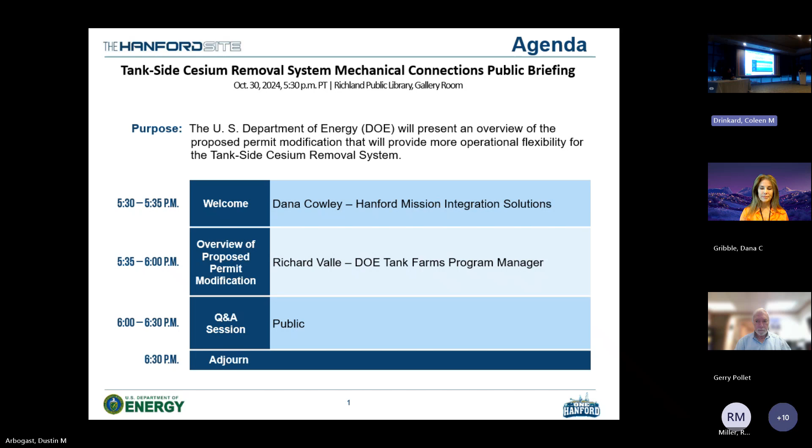Okay, thanks, Dana. Coming through okay? Yes. All right, well, I see we have the slide deck up, so just again, want to give an intro.

As Dana mentioned, we're here to discuss a proposed permit modification. It's under a particular section of the permit, the low activity waste pretreatment section, and we're going to be talking about a particular unit, the tank side cesium removal system, or TSCR system, as you might hear. I'm Richard Valle, a program manager in the Hanford field office in the tank waste operations division.

If you've joined us on a few of these before, we always like to take the opportunity to discuss a very important process occurring on the Hanford site that will continue. So the direct feed low activity waste, or DFLAW configuration, is something we're gearing up towards and will ultimately lead towards the treatment of tank waste at the Hanford site.

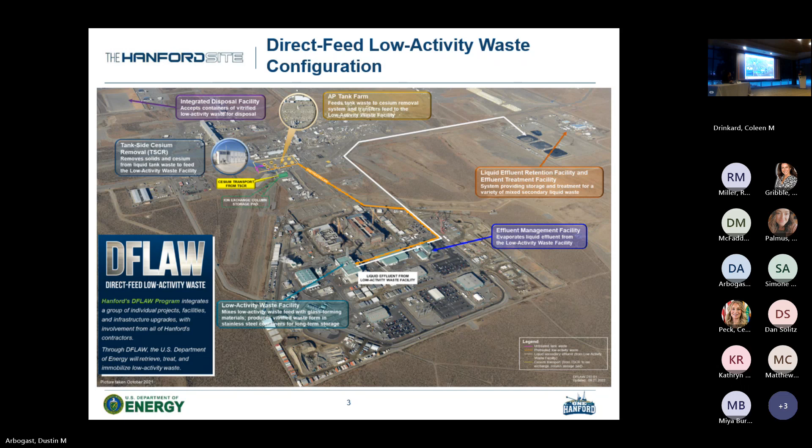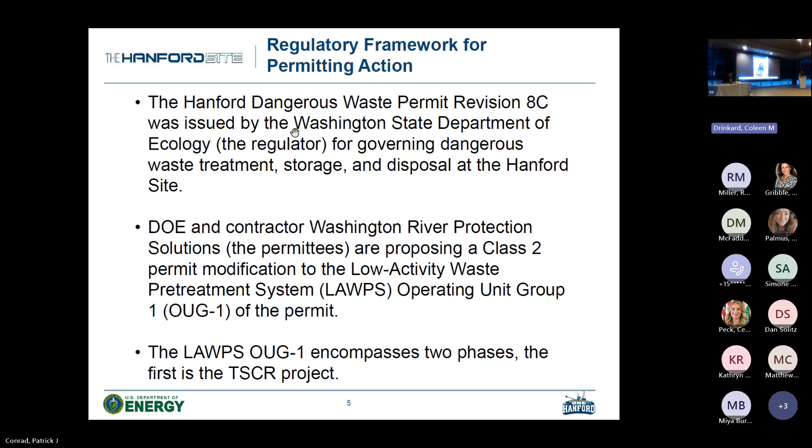And reject streams that are generated during the pre-treatment process are routed to AP 108. As part of that pre-treatment process, to remove the cesium, it uses ion exchange columns, or ion exchange technology. Really, that's a resin material that has an affinity for cesium. The cesium gets loaded onto these columns, and then they become loaded with cesium. They are then swapped out and replaced with fresh columns as needed.

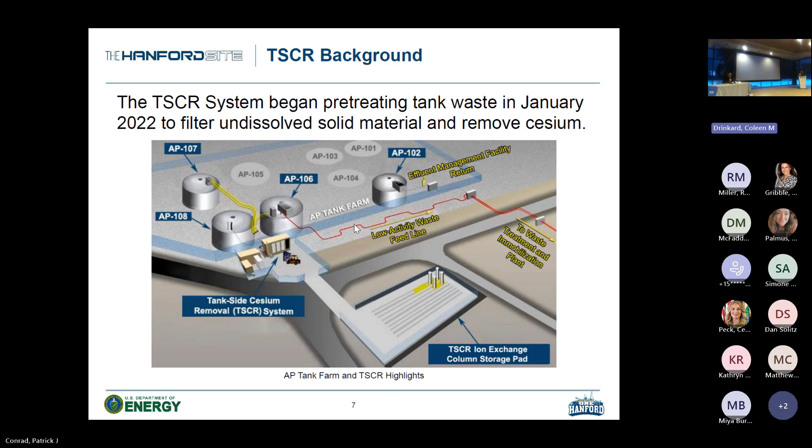You can see the TSCR ion exchange column storage pad at the bottom to describe what we're talking about. So as we load up those ion exchange columns, we'll place them on the TSCR storage pad and continue the pre-treatment process with fresh ones. And then, as we mentioned, in the grand scheme of the DFLAW program, that pre-treated waste then makes its way to the waste treatment and immobilization plant for vitrification, which has not occurred yet, but we have been operating the TSCR to generate that pre-treated material when it is up and operating here shortly.

Okay, over on slide 8 now, the TSCR system. This is probably, again, just putting what we talked about in words on the prior slide. So the tank waste is transferred from AP 107. It makes its way to the TSCR process enclosure via hose-in-hose transfer lines. Those were those yellow lines that we called out in the prior slide.

And then a very important point of emphasis for tonight's discussion: for worker safety, there's really no manned entry into the TSCR process enclosure permitted during waste processing operations. So that's important, and we'll call back on that in subsequent slides here.

But the general arrangement here for TSCR is then shown, still on page 8. There's different enclosures that make up TSCR, the process enclosures we've been talking to, but then there's also an ancillary enclosure and a control enclosure. We'll focus tonight's discussion on that process enclosure.

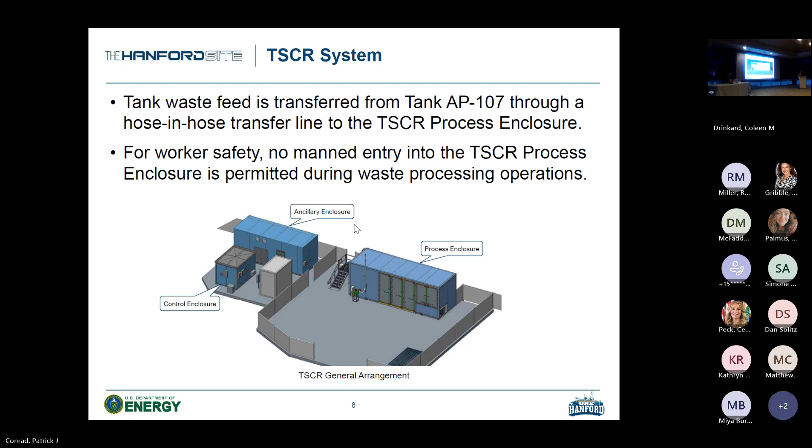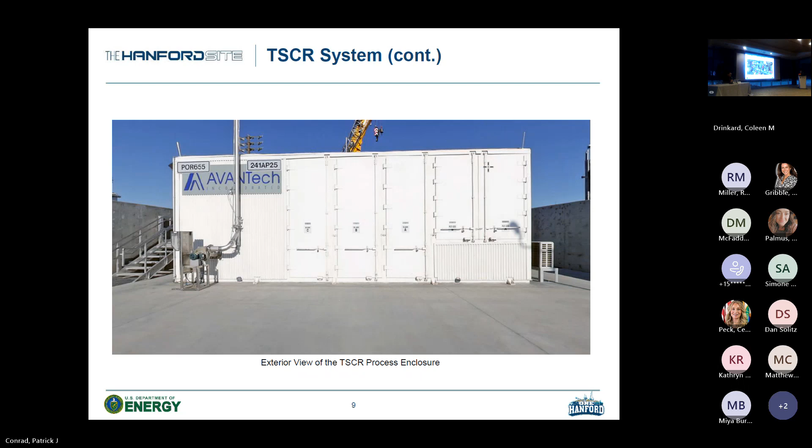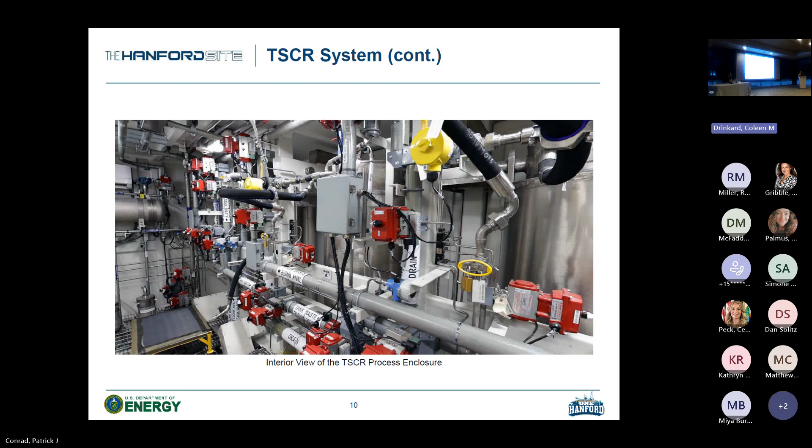Okay, so really the purpose of tonight's discussion is to focus on slide 12. The TSCR is a demonstration project that is currently operating, and we've learned a lot from implementing the system.

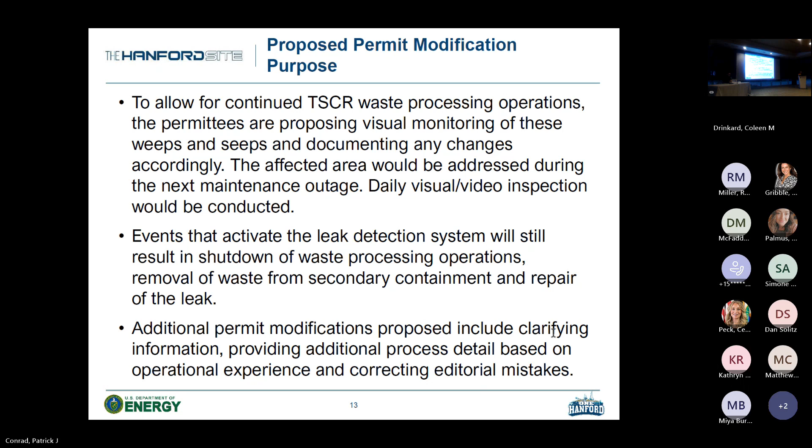Okay, I'm on slide 14. Actually, it's working. So, but still, I'm on slide 14.

So again, to kind of wrap it all up and reiterate some important points, this is a Class 2 permit modification that's being proposed for the low activity waste pretreatment system section, that operating group of the permit.

There are 3 particular sections or subsections within that part of the permit that have been modified as a result of today's proposed modification. That includes the unit-specific permit conditions, Addendum C, which describes process information, and Addendum F, which describes preparedness and prevention. The full proposed permit modification and all the language is available to you on the Hanford Dangerous Waste permit change notice that's available attached to this meeting invite on Ecology's webpage.

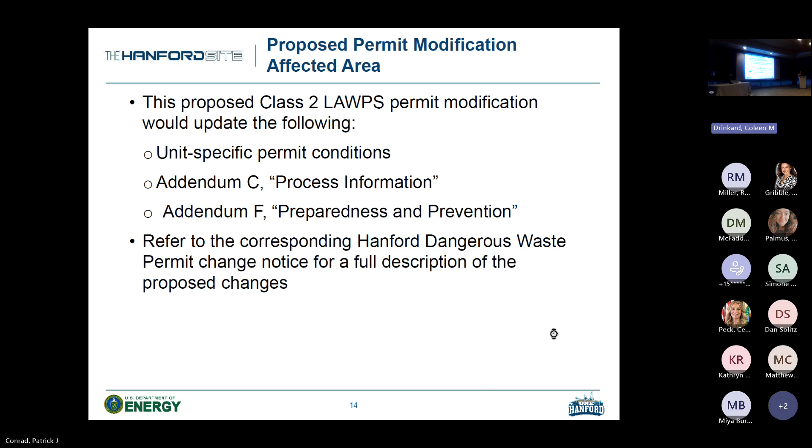On slide 15, the proposed Class 2 permit mod has a 60-day public comment period. As was mentioned earlier, it's open through December 12th. It's open currently, and it'll run through December 12th. We encourage you to submit comments electronically as preferred via the hyperlink noted there, but snail mail is fine too, and that can be sent to the address listed below.

I think that opens it up for the last slide, which was for any potential questions.

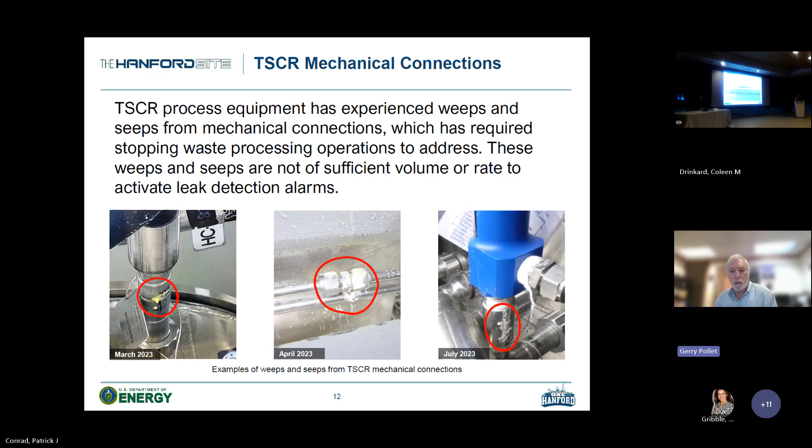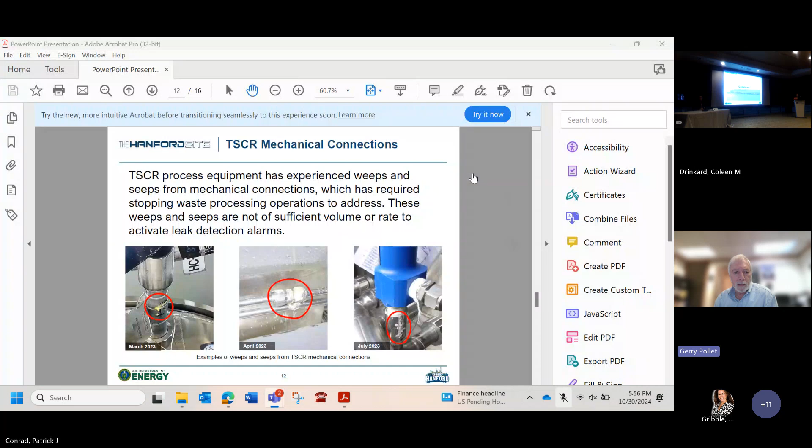I have a couple of questions, and one is a follow-up to me. The link from the notice document has the transmission of the permit proposed modification. There is no RCRA permit fact sheet, which usually accompanies a modification, as part of that. Is this a brand new write-up for this section of the permit, or is it indeed a modification?

It is a modification, so the current section exists, it's been modified. There are red lines, if they're not posted online we'll have to check into that, but it is a modification, a red line update to the existing permit section to account for this proposed changes.

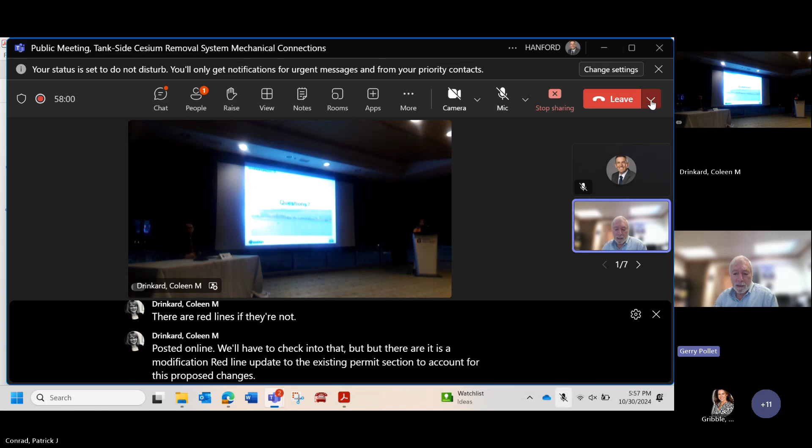They may be redlined. The difficulty is that if you look at the contents, it doesn't show you where to go look for anything that is redlined, and the scan through didn't. My interest, on the substance side, is what is the leak detection minimum alarm requirement currently, and how does it relate to what has been weeping, seeping, and accumulating? And secondly, how are the requirements handled for visual leak detection inspection addressed when there is no permissible entry?

Okay, so the weeps and seeps, there has not been an instance where it's actively leaked to activate the leak detection alarm. So these, like is shown on the photo, they are weeps and seeps outside of where it should be, out of the piping material, but they solidify as was noted and shown, and have not activated the alarm. So in terms of quantification, that's the quantification there.

And then the third, or your, well I guess, question. The first part of the question is what would trigger the alarm? What is the minimum leak detection specification in the permit for triggering an alarm, and what kind of backup is there if there is no visual? Sometimes there are pits, etc., that have a visual inspection, remote visual opportunity for ensuring that there's no leakage from a hazardous waste treatment tank or piping, in order to back up a single leak detection alarm capability.

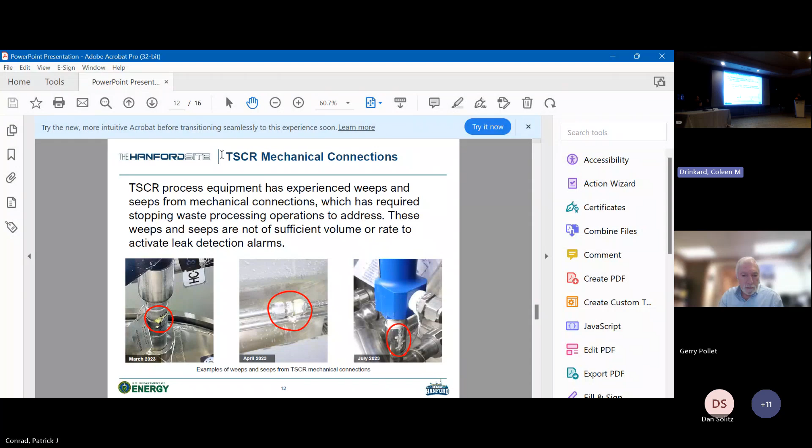Right, I'm correct. I would jump to slide 11 there. And if we could do the same, that'll show a schematic of that. So this is the TSCR process enclosure cutaway that shows the sloped flooring, and it slopes towards the low point. And this is that leak detector and pump. An active leak would make its way, slope to the leak detector alarm, shut down operations, and then allow for the corrective actions to address the leak.

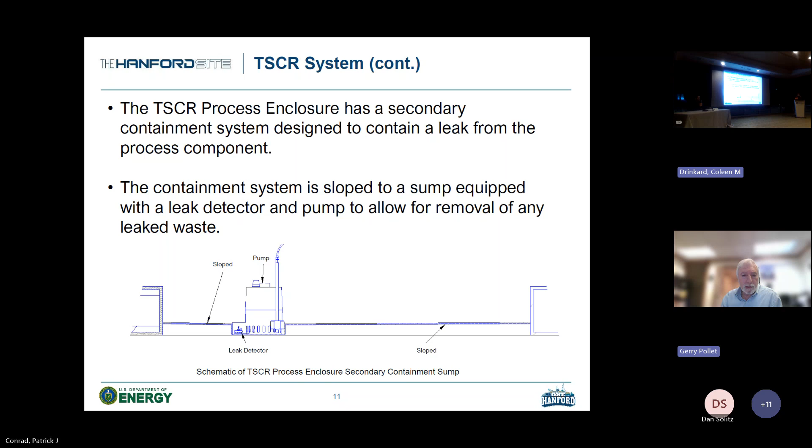So the weeps and seeps that we discussed tonight are not of an appreciable quantity that have made their way to the leak detector. We can see them because of the visual inspection that they have made their way — they wept and seeped out through visual inspection. But again, they have not activated the alarm. So the leak detection is entirely based on reaching a quantity that could reach the sump.

My last question then would be, in terms of worker safety and health protection, what is the procedure given the fact that there may be residues of waste on piping, and a leak detection isn't going to detect that in advance of re-entry? How do you handle protecting, and does the permit address protections for worker health and safety re-entering the process area?

So the weeps and seeps have been and will continue to be identified through the visual inspections that we do via camera, and so we would identify those as proposed tonight. We monitor them, and then at the next maintenance outage — TSCR operates in batches, so there is downtime for maintenance as we prepare for a subsequent batch — it's during that maintenance outage where we'll perform all the necessary work planning that includes worker protection and health, to adequately address the weeps and seeps and clean them up.

That may also include addressing the engineering side of it, if there needs to be things tightened or replaced or corrected. We have the opportunity in those maintenance outages to address it, and yes, they'll take into account worker safety as we plan that work.

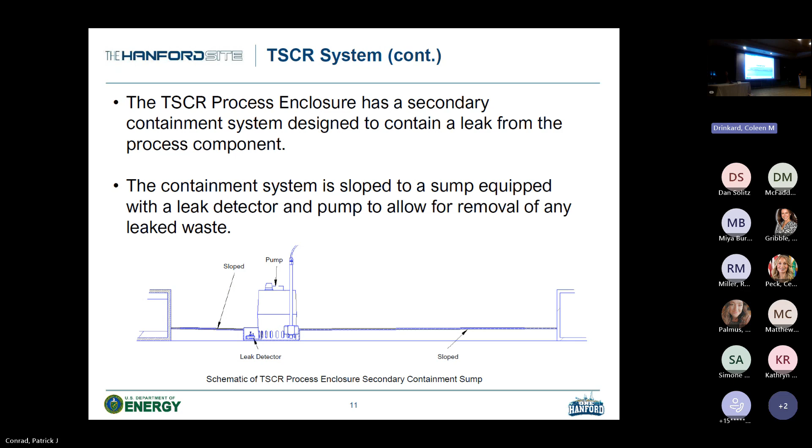Are there any questions in the room? Any new questions in the chat, Coleen? We did have Matthew Campbell's hand up for a minute, but I don't see it up now. So Miya Burke did have another question. And Matthew, if you did have a question, if you can raise your hand. But for now, Miya, feel free to ask your question.

Hi, thank you. So Richard, how often do the maintenance outages occur?

There's a maintenance outage after every batch. So again, we operate in batches, and then we will perform preventative and/or corrective maintenance in between batches. So it just depends on — go ahead, sorry. How often does it occur? I mean, is it every month? Is it every 3 months? Every year?

We plan a campaign out. A campaign is then the culmination of those batches to get us to a target goal of pre-treated waste. And right now, we're in a maintenance outage. We're planning towards batch operations here shortly.

I don't think there's one defined answer. Generally, we'll operate for 4 weeks, 25 to 30 days, and then we'll take a maintenance outage to address anything and everything we need to, including preventative maintenance and corrective maintenance. So you can't really quantify that. It's just, we will plan what needs to be done before starting the next batch operations.

I'm curious because that's the amount of time that if you find the leak on day one, your weep or seep will be there for up to 30 days without anybody going in to do something. Is that correct?